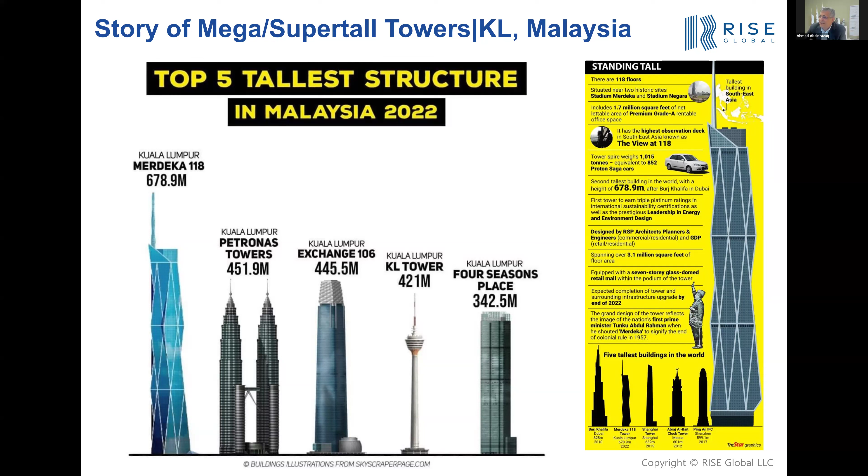During construction of this project, we introduced a very high strength concrete, and the QA/QC program done for this project was very unique. At that time, the concrete strength was about C80 concrete, and for almost 30 years nobody had used higher strength concrete until we came in and used C105, which I'll speak about for different reasons.

Now, the developer is PNB, National Investment Corporation, which is for Malaysians only. The employer is PNB Merdeka Venture, and we worked under Dato Tan Sri Abdul Azim, who was the CEO of the project from its inception to completion.

The contract administrator was Turner Construction, or Turner International Malaysia, where they did the contract administration mostly.

Some of the consultants include FKA, the international architects of the project, and RSP, who were the local architect of record and the executive architect.

For civil and structure, Lera out of the US did the schematic design and 50% DD, and Arup Malaysia, in collaboration with Arup International, were the structural and civil engineer of record. M&E, LEHR out of the US and KTA were the local consultants.

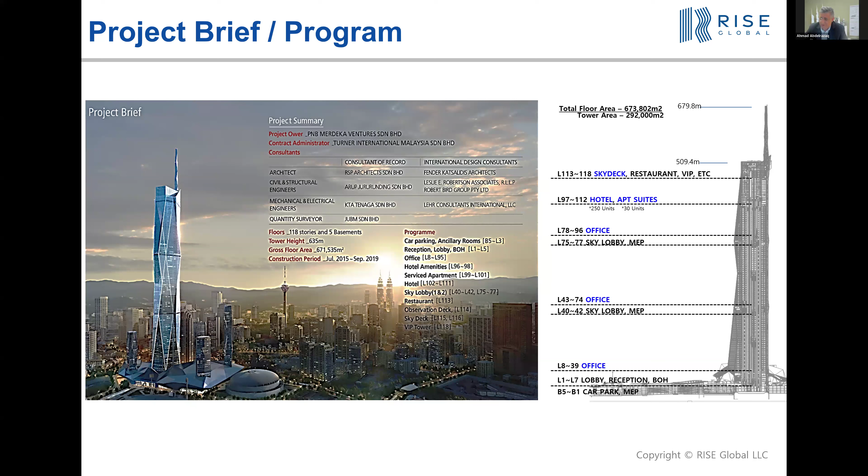The development of Merdeka 118 is a new project located in a very highly dense area near Chinatown. This area has big historic significance, but the traffic was also awful getting in and out of the area.

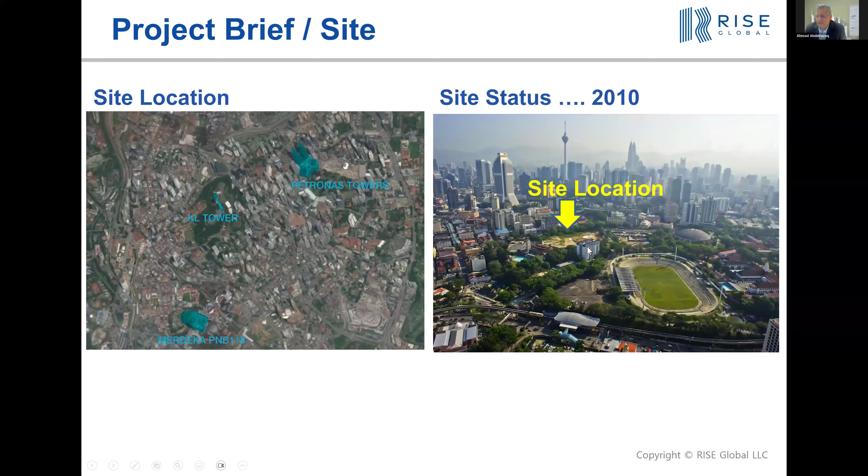The total site area was huge, with many activities going on with the infrastructure. The site was very big to be accommodated, so the client took it on itself as a national company to enhance the infrastructure.

They did analysis for the entire site in terms of traffic, and decided to add metro stations and a lot of roadways to improve overall circulation, making the site accessible to the LRT and monorail. They improved the whole traffic system over the entire site, so a very large number of people get into the site using mass transportation. A lot of traffic analysis was done by the client to improve the access problem and make the whole thing work.

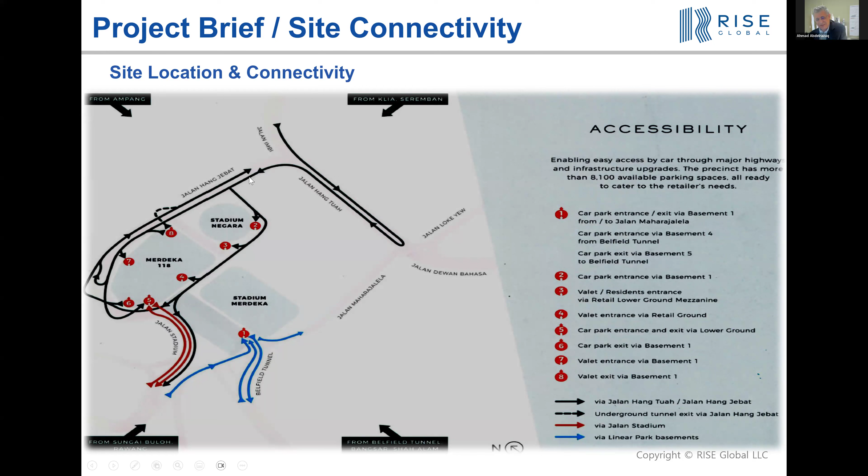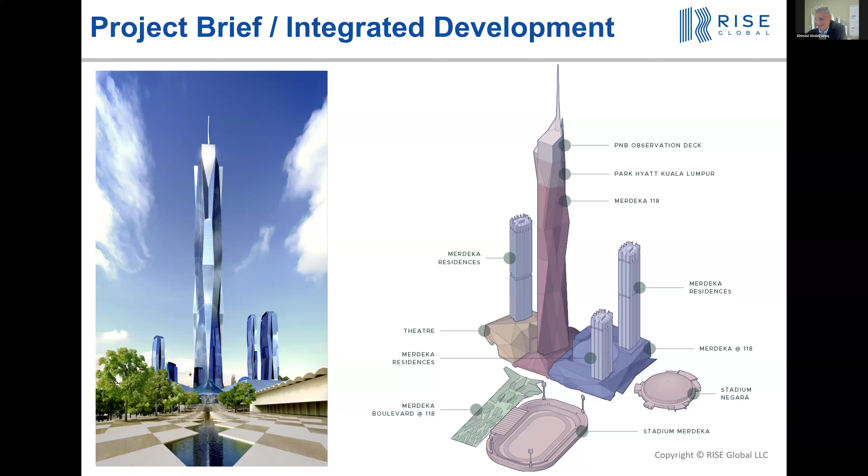Near the site they were building a train station. So imagine deep basements, a train station, Negara Stadium, Merdeka Stadium - all on shallow foundation, and we had to weave through all of this with a 5-story basement. Managing the vertical and lateral movement of the site was extremely important because we didn't want to affect the foundation, since any kind of settlement would have been detrimental to these buildings on shallow foundation.

The architectural design concept of the tower is very much influenced by the traditional Malaysian songket pattern, signifying diamond shapes, expressed on the outside of the facade. The spire's symbolic image resembles the silhouette of Prime Minister Tunku Abdul Rahman when he declared Malaysia's independence at the Merdeka site nearby - one of the significant things included in the design.

As Samsung's scope of work, essentially we built the site over this entire area, which goes around the Merdeka Stadium where independence took place, sitting on shallow foundation, and Negara, also on shallow foundation. We have a train station running across, and also a stadium nearby, all sitting on shallow foundation. The total site area was 76,000 square meters.

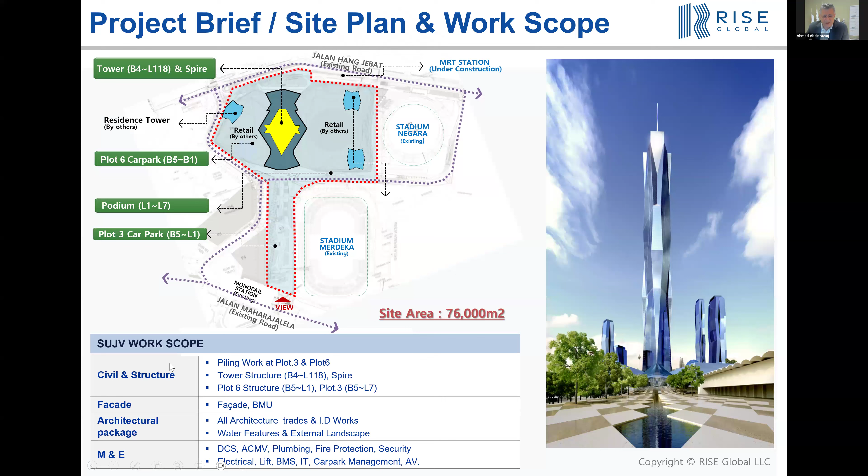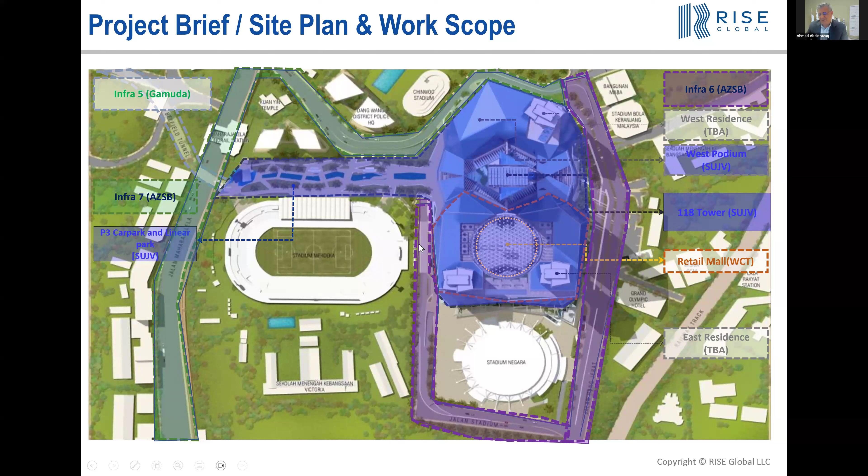Our scope of work was civil, facade, architecture, and MEP. The blue area was under our scope, but all the infrastructure going around it was under different contractors, so interaction and interface with all the other contractors was extremely important - we were in the middle of it. To complicate things even more, the client gave the retail to another contractor, so we were in the middle of all of this, presenting a huge challenge from a logistics and coordination standpoint.

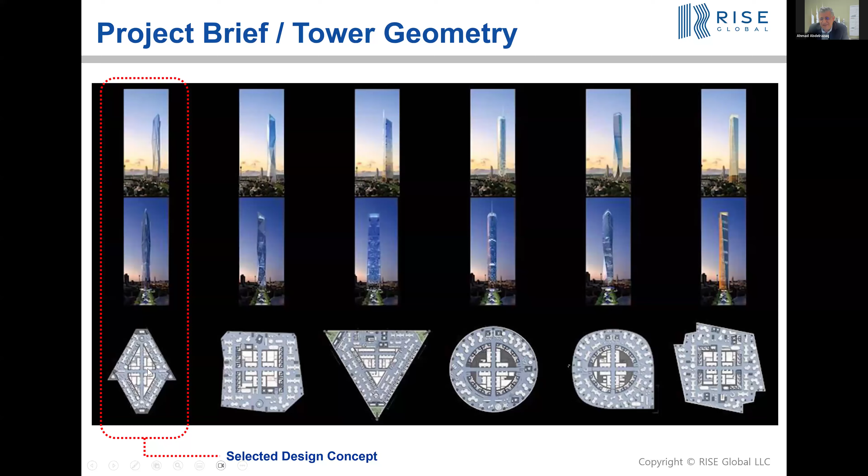Where did the design come from? It wasn't a design competition - the client selected FKA as the architect, and they proposed several schemes. The client selected the diamond shape scheme, which from a structural standpoint is not that easy - it's not the most efficient one for either wind or structural arrangement.

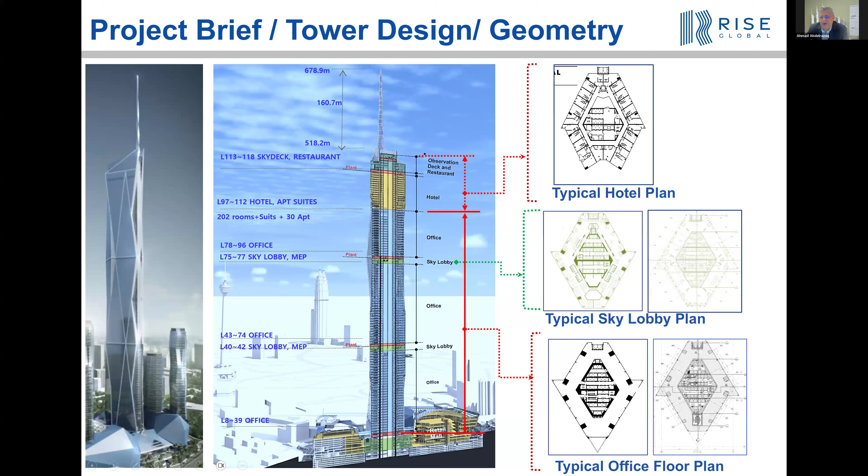This is what a typical office floor looks like. We have a central core, a mega column on the outside, structural steel framing inside, and a small steel column that transfers. These are at the edges of the building, coming in and out. This is a typical sky lobby, and a typical hotel floor from an architectural standpoint. The total spire height is about 161 meters.

One of the challenging aspects of this project is the wind engineering. When you look at this project, you'd think there's a lot of variation in the shape as you go up the height, giving the impression that wind is not that critical. But Malaysia has very benign wind - it's near the equator, and they don't have much seismic activity either.

However, if you look at the basic wind speed for Shanghai, Seoul, Busan, or Guangzhou, which are very high wind areas, for a building of similar height compared to Merdeka, the basic wind speed in Malaysia is 35.

Because of the shape of the building, there was a lot of crosswind response, in which the bending moment was so high—bigger than any of the other buildings—because of the dynamic response, which presented a big challenge.

The other challenge in this building is the neutral axis. Most of the material in the core, in the weak axis, is essentially very much concentrated here, and there is very little to maximize the moment of inertia of the building.

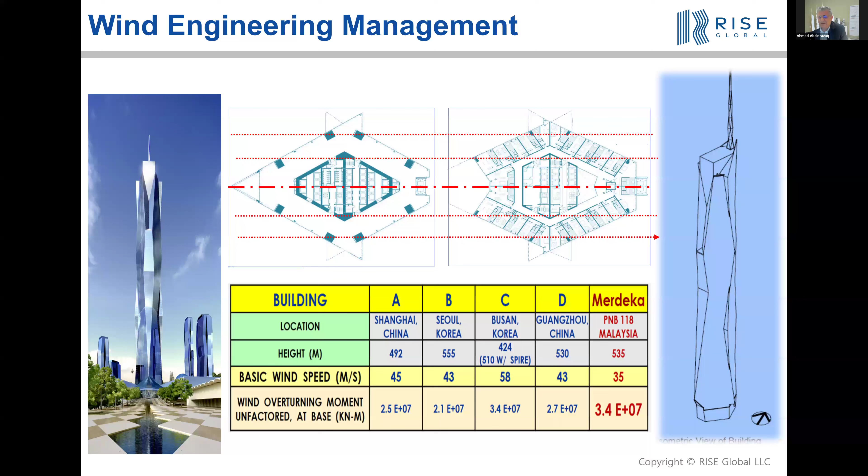And by doing that, we took out about 14,000 tons of rebar on this building.

In terms of wind engineering, the shape of the building is not ideal—it's like an airfoil. The Strouhal number for this is roughly about 0.6, and sometimes even higher. However, if you look at a square building, it's 0.12 or so, which means we had a lot of dynamic excitation on this building.

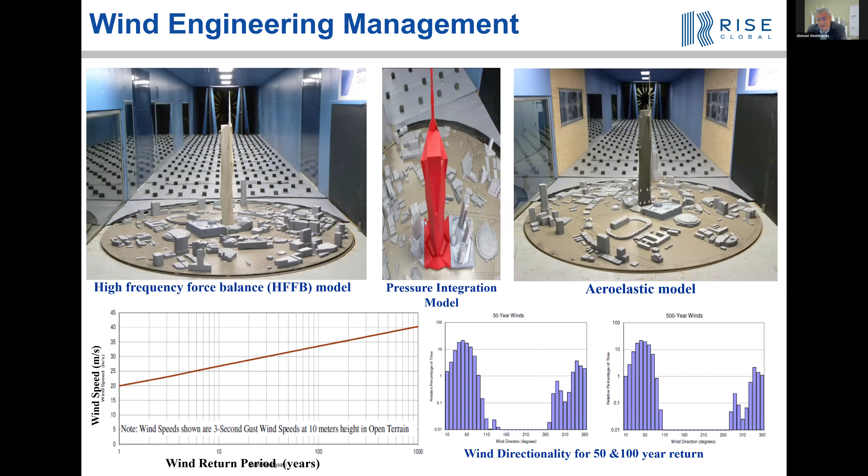We did a lot of wind tunnel testing, including high frequency force balance, pressure integration and aeroelastic testing. I won't spend much time on this because we had to redo some of it during the redesign of the building, but fortunately we didn't change the properties much. We also did cladding and pedestrian wind studies.

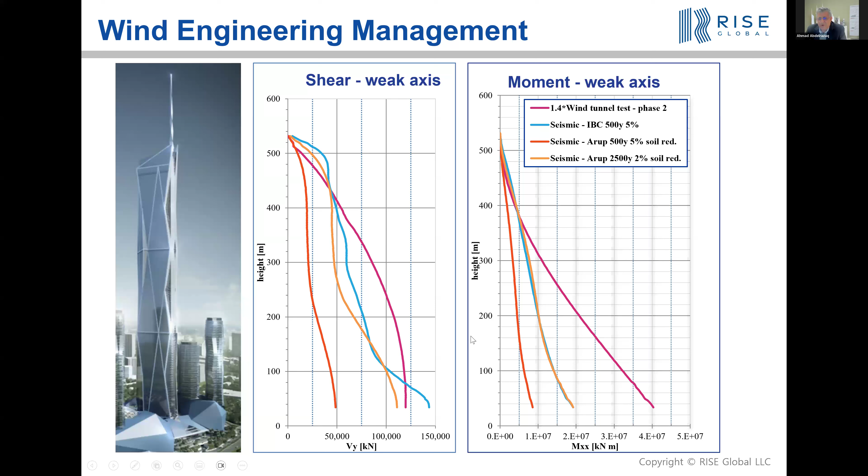What you see here is a comparison—as I mentioned, Malaysia is a low seismic region, however it's very close to Indonesia, which has very big earthquakes. It's an active area. We looked at long-range and short-range earthquakes in the region with site-specific analysis. Essentially, seismic really didn't control most of the design—the building was controlled mostly by wind, for both overall drift and behavior.

In terms of building acceleration, this is an office and a hotel, so we are within the acceptable range, and we didn't need any damper on the building.

Essentially, in the original design, when we redesigned the building, the client requested that we deliver a building with equal properties to the original design. So when you develop an alternative design, how do you match that? We did not change the structural system per se, the arrangement, but we were able to manage it, as we'll see later.

Some of the challenges of this project: the building is founded on 138 bored piles, varying from 2 to 2.5 meters in diameter. There are 8 mega columns, and they are pretty big—as I mentioned, 4.2 by 3.6 meters.

And the hammerhead—this area on top of the core where they concentrated most of the concrete in order to maximize the moment of inertia—is 7.4 by 4.35 meters. Initially they had a lot of rebar in them for additional stiffness. We were able to take out up to about 4%. It was a nightmare to do the rebar with this kind of arrangement.

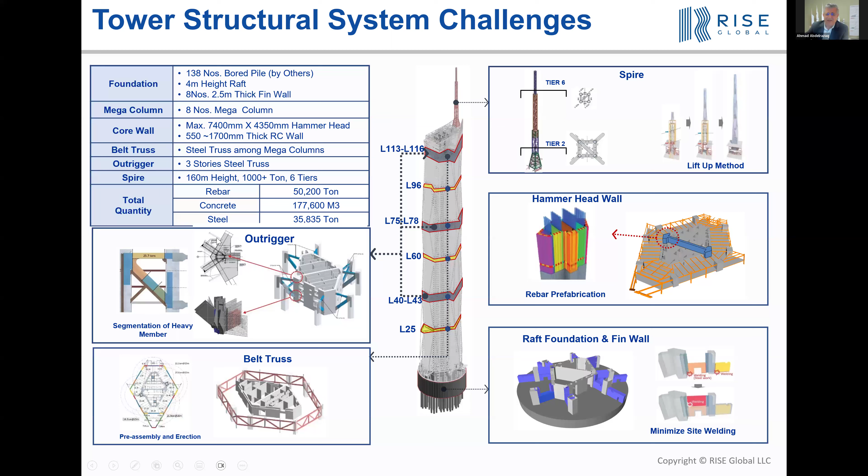The building is essentially linked together with outrigger trusses to the mega columns at 3 levels along the height. The spire lifting was very slender, and its constructability was very critical. We'll talk about those a little bit more.

This one demonstrates the lateral load resisting system of the spire of the building, which consists of the center core linked together with outriggers at 3 levels: 40 to 43, 75 to 78, and 113 to 116. This is because the building stiffness in the north-south direction is much stiffer than in the east-west direction.

Initially, we didn't really want the outrigger, but the client insisted to keep some of them. So we kept the lower one and the upper one only.

When you have a building like this, where it's a mix between concrete, composite column or concrete column, and then a structural steel element in between the transfer, the question is how do you manage the levelness of the floor and the construction sequence to make sure creep and shrinkage studies and column shortening are all taken care of.

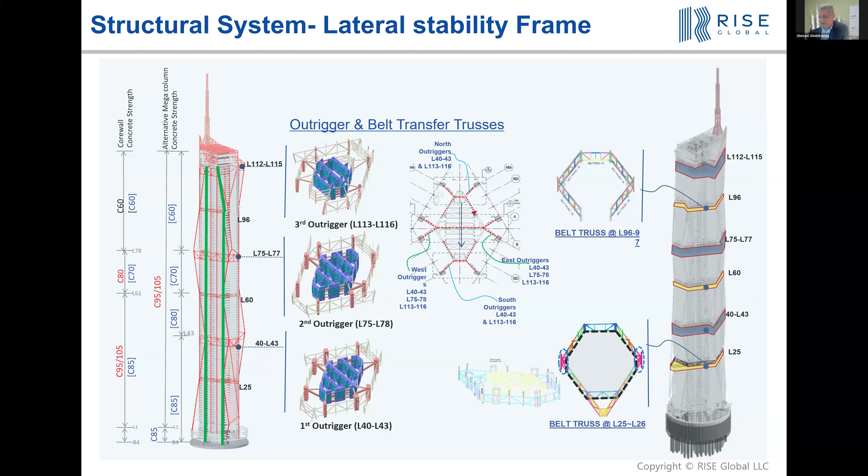The other challenge on this building is that the core at the upper building is asymmetric. So we have a very large lateral deformation due to the asymmetry of the building, and that's another challenge in terms of managing the verticality of the tower.

In summary, what we have is a concrete core using the ACS formwork system. We have mega columns here, which are mostly concrete, and then a structural steel column that spans about every 17 floors, which gets transferred to transfer trusses or belt trusses connecting to the mega column.

As I mentioned earlier, this kind of arrangement means the floor framing system is mostly composite steel structure. The differential shortening between the core, the mega column, and the structural steel elements was a very big challenge, so we had to do a very detailed construction sequence analysis and compensation program to achieve a leveled floor.

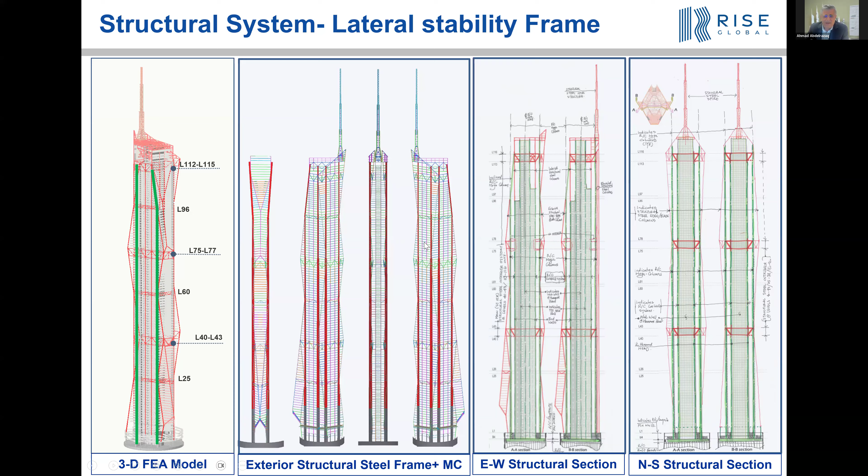These are just a summary of the lateral systems. The first one is the exterior frame, as you can see from the outside, and the east-west section of the core, and then the north-south section showing the center core and the outriggers at some of these locations. This is just an overall summary of the lateral system.

This is what the exterior envelope looked like for different sections. As you can see, it varies all over the place, but at least the columns were continuous, and only the structural steel elements shown in red vary.

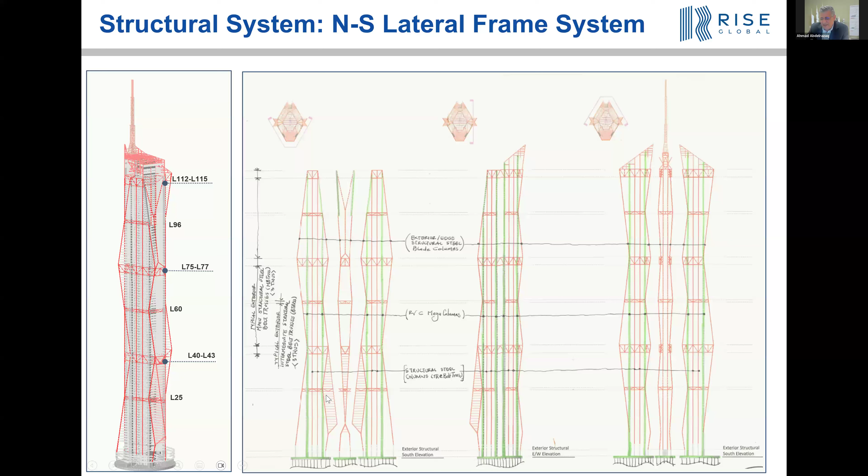And then we have a very big atrium from level 8 all the way to level 43. It doesn't really have any function - it's just an atrium where the observation elevator goes through.

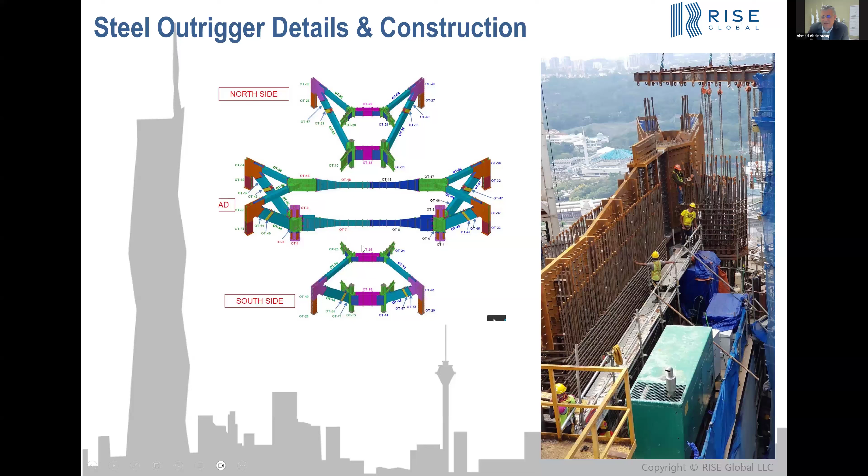The other challenging aspect of this project is related to the hammerhead. As I mentioned, we have the outrigger detail, so we were able to develop a detail made of structural steel elements to simplify the construction. We converted everything from structural steel members to more steel elements to take the tension and compression forces. This is just a picture of what the outrigger looked like.

This is a person here, what you see here for scale. So I developed an alternative design for the outrigger made out of steel plate. Initially, it was going to be casting, but you couldn't really do casting for this kind of size, and we couldn't find anybody who can guarantee the casting.

So we looked everywhere, including Spain and Europe, and China, but we weren't able to find somebody who's able to do the casting. So we did it with built-up structural steel elements instead.

So I developed an alternative design in which we were able to create a pre-assembly for all the mega columns, including two small structural steel erection columns. We created a template in which we installed all the rebars with couplers, perfectly pre-matched. Then we were able to erect a pre-assembled mega column, including steel, rebar, angles, embeds, and connections to the steel, making it part of the structural steel construction, which made life much easier for the labor.

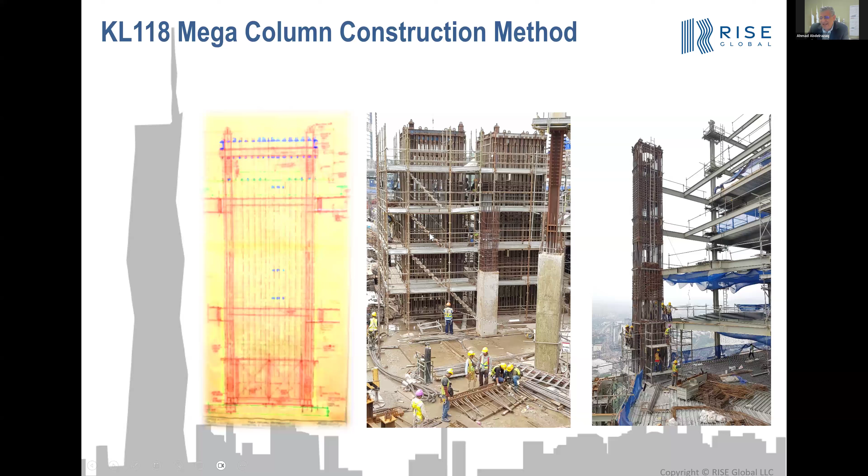We also increased productivity significantly because all the pre-assembly was done on the ground and lifted up into position, so we didn't need a lot of labor. Productivity went up from 250 kilograms per man day to about 2,500 kilograms per man day. This is just showing some of the member sizes, which I won't go into detail on, but the picture here shows how it works.

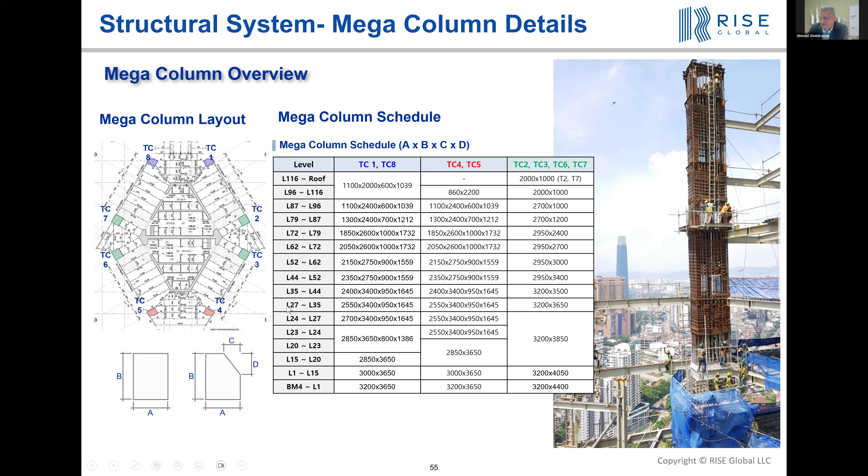One of the challenging aspects of this project is the mega column, the hammerhead. As you can see, it's a 7.4 meter by 4.3 meter solid concrete element in order to give us the moment of inertia. Initially it had about 4% rebar. We were able to reduce it by using high performance concrete up to about 105 MPa with high modulus to about 1%. That made life a little bit easier.

But the other challenge, because of the size, as you can see, it's a very long element in both directions, so we need intermediate rebar in order to hold the rebar and keep it from sagging.

In addition, we developed an alternative solution where we were able to use a Baugrid system in which we could organize this in a much better arrangement. Instead of having a central core, we were able to divide it into 2. We did a very detailed Abaqus analysis to show the performance of the two. The confinement has to be considered, the core is much bigger than the concrete that we have to confine. With this kind of arrangement, we divided it into 2 smaller cells.

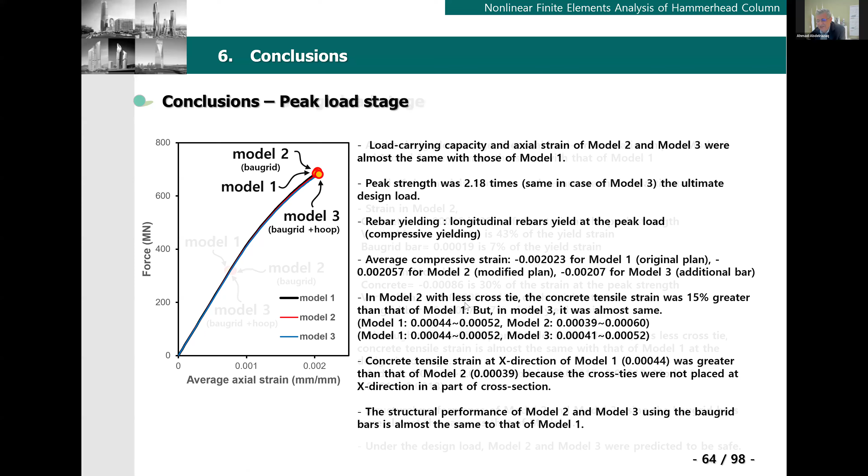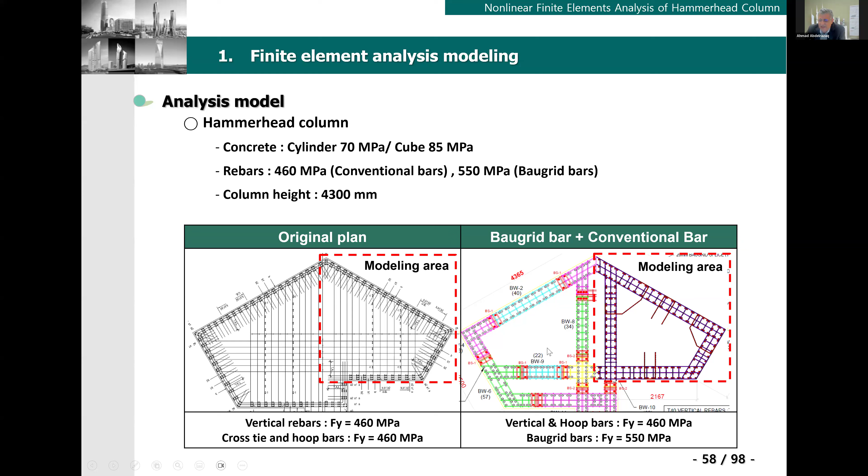I think in the future this is something that the code doesn't address, and it's important when you have these massive elements, from a stability standpoint, you can have a really nice ring, very tight together, very nicely. Sometimes it's something we can look at in the future, how we can improve the detailing of such massive elements.

Now, in terms of the concrete planning work, initially we started with C85 concrete, C70 and C60, but in order to take 14,000 tons of rebar, we used C95 with high modulus. When we did this, the client wanted to guarantee we have all the aggregate, so we went to a quarry in Johor and pretty much bought all the aggregate at once, guaranteeing the client there would not be a shortage.

At the same time, because this is the first time C105 is used, and we use C95, we did a lot of study correlating concrete strength cylinder versus cube. We decided to convince the client to just do a cylinder test at the end of the day. We did a huge amount of work correlating the two together, and using cylinder was definitely a much better test than using a cube for this kind of testing.

So we did a lot of work on this for the planning: trial mixes, mechanical properties, durability tests, creep and shrinkage tests, pump simulation tests, heat of hydration tests, because this is in a very hot climate and at the same time we have massive elements, including the raft, the hammerhead, and the mega column. So procuring these elements became extremely important.

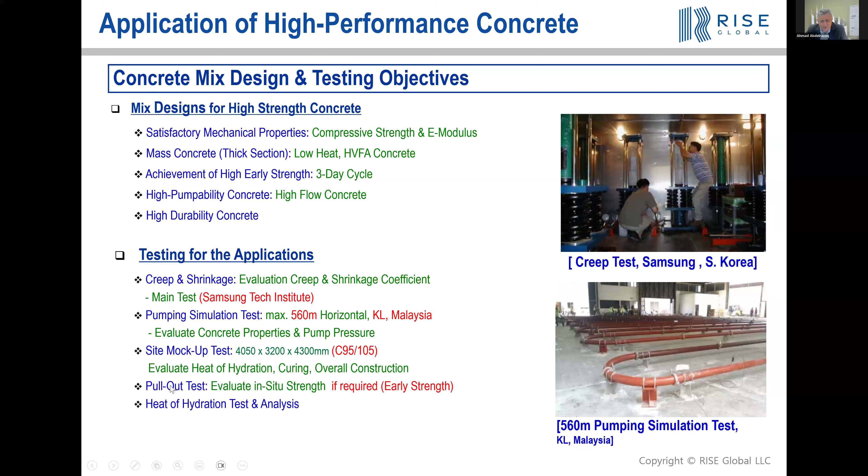But we did a lot of work with Lafarge and our concrete team, and myself, to develop a mix design that is very sustainable, high flow, and also low heat of hydration, where the temperature didn't exceed around 70-75 degrees maximum. It was a triple blended cement where we have OPC less than 50%, which I'll talk about a little bit more. So we also did heat of hydration analysis for the raft.

Because we had a dedicated batch plant on site for high performance concrete, very close to the site, we were able to use icing and shaved ice, along with a lot of QA/QC programs to keep the temperature of all ingredients and additives under controlled temperature. Everything was sprinkled, cured, and protected from sun to keep the temperature down. We achieved mixing temperature of about 25 degrees. For mass concrete we targeted 28, but achieved less than that due to proximity of the plant to the site, and we managed the temperature of the raft and mega column within 70 degrees centigrade.

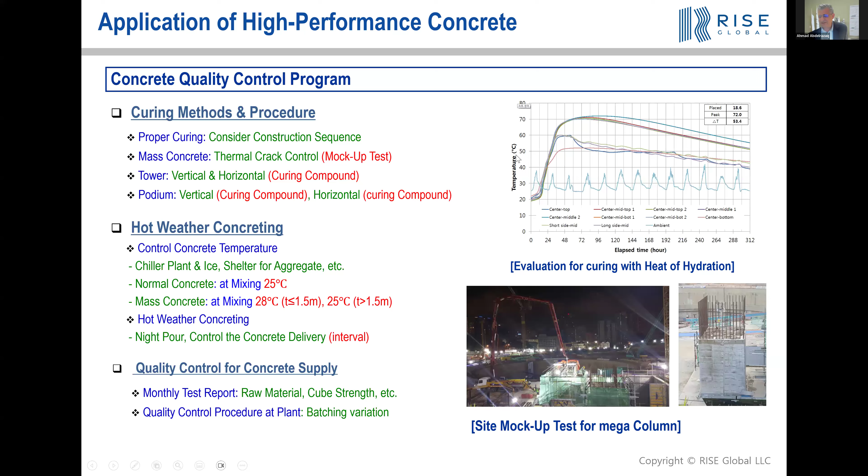These are the concrete mix designs. We have the same mix design, with the main difference for low level being that we used 145, 550 binder, almost GGBS 45%, silica fume 10%, so roughly 55%, with the rest OPC. For the CM, it's the same, but we mostly changed the aggregate size, keeping all aggregate size to about 14 millimeters. We didn't change that a lot.

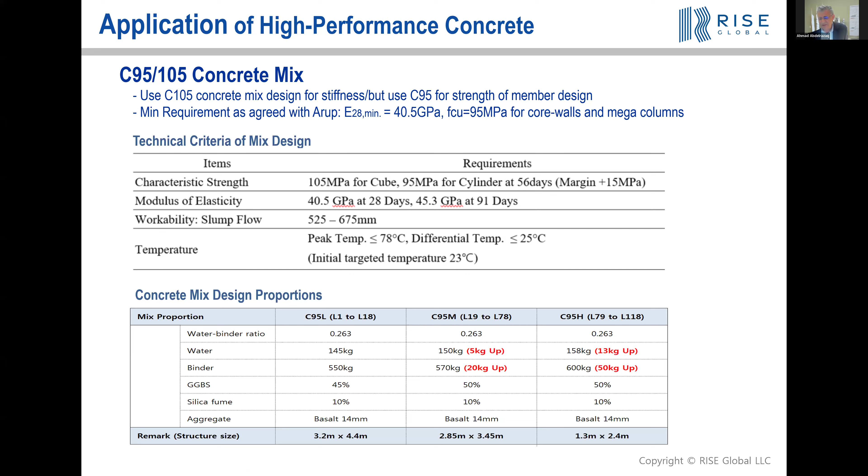We kept the temperature differential within 25 degrees. We didn't have any cracking on the concrete column or the mega column. We cured it properly, and this shows the concrete strength.

So the strength was not the issue, we were looking for stiffness. We agreed with the client that we would achieve 95 MPa cylinder strength, but actually what we were getting at 90 days was about 110. So we had about 15 MPa more strength than needed as target, so the client could feel more comfortable.

For the modulus of elasticity, what we initially targeted was about 40. We told them that with 91 days we would achieve up to about 45. But in reality, at 91 days and above, we were able to achieve up to about 50 gigapascal of modulus of elasticity, and that helped the project enormously in terms of behavior.

This is a large-scale mock-up test that we did for the heat of hydration, which I showed earlier.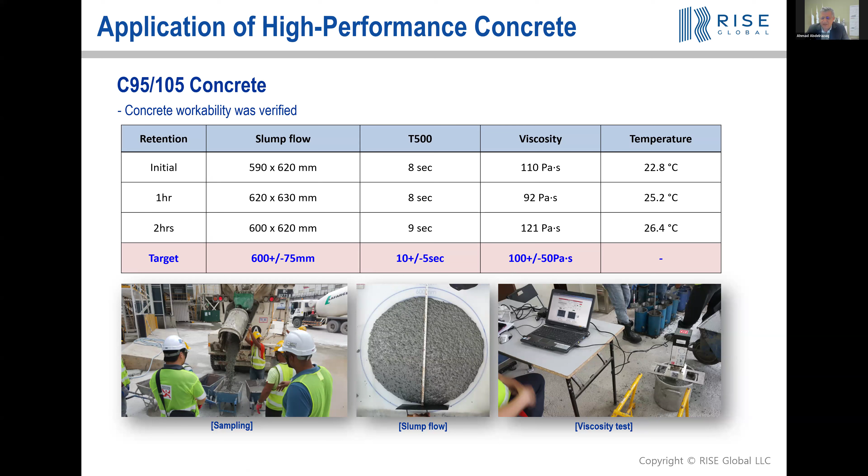This is also in terms of workability. We had the slump flow targeted at 600 millimeters, and we needed to make sure the viscosity and the rheology of the concrete were important. We did a lot of work, as I mentioned, between ourselves and the Lafarge team to make sure we achieved a very nice system without any segregation or bleeding at all.

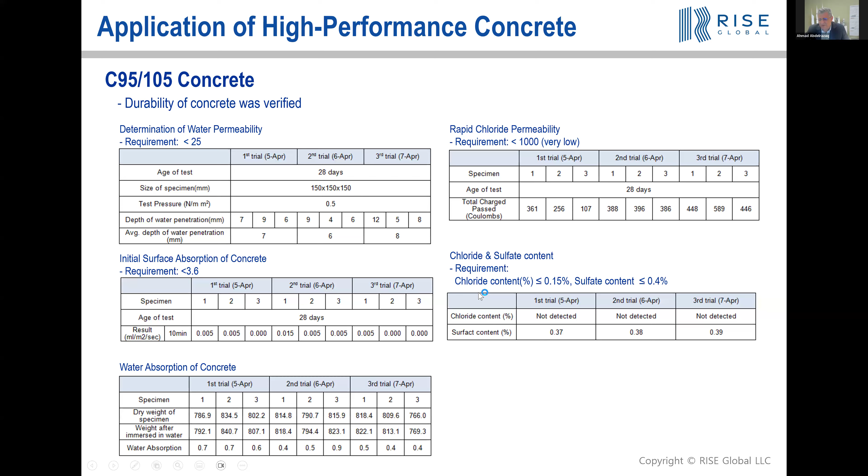We also did durability tests: water permeability, initial surface absorption, water absorption, chloride permeability, and sulfate content. We did all of that, and it's all well below the requirement.

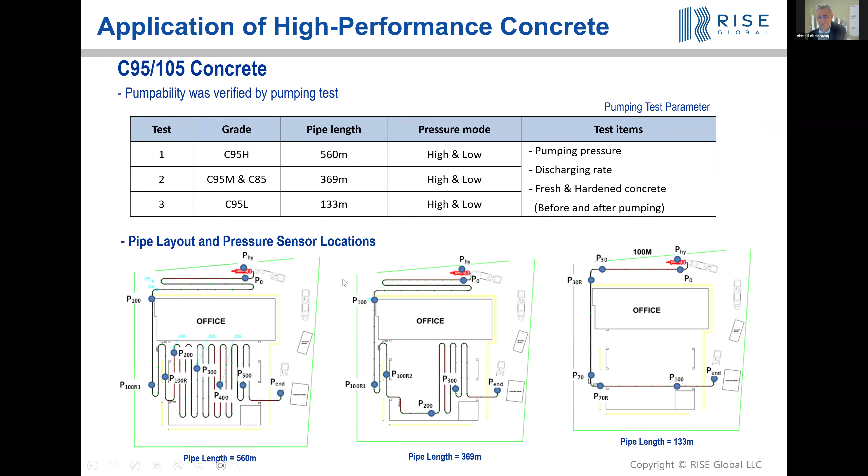This is the pumping test we did for all the different mixes that we have: 133 meter, 369, and 560, same kind of arrangement, using the deposit and then checking at the end with pressure sensors to look at the losses and how to apply it vertically. This is just a concrete setup we did at the site, very close to the project.

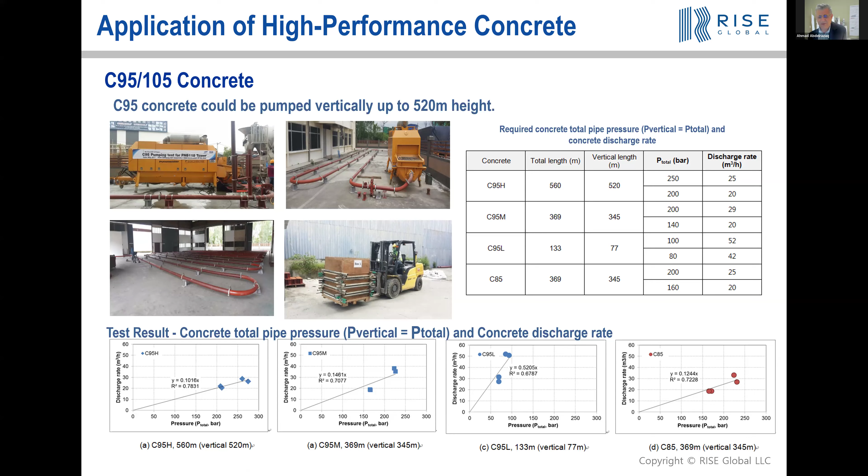For creep and shrinkage studies, we did all kinds of tests, sealed and unsealed, because the concrete stress on average is about 15%, since the members were controlled by stiffness, not necessarily strength. But we did the creep and shrinkage tests, especially creep at different stress levels: 15%, 25%, and some samples up to about 40%, just to make sure the behavior is okay.

Everything was under controlled temperature. No matter where I am, I can access the room, I can access the temperature inside the room, the humidity, the load cells, and the results of the strains for all the samples. So it was a pretty nice setup, a real-time measurement system that we had.

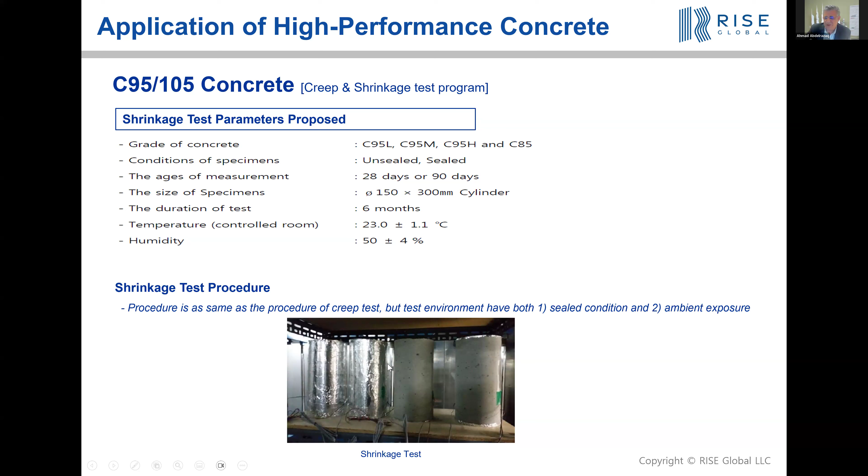This is something we did with sealed and unsealed samples, as I mentioned, in order to do column shortening analysis for the project to make sure that the planning is done right.

One of the things you will see here in terms of modulus of elasticity, we compared what we measured at 3 days, 5 days, 7 days, and so on. We actually have a laboratory at the site where we were able to measure the strength and modulus of elasticity on site, so we had a lot of flexibility to get a lot of data.

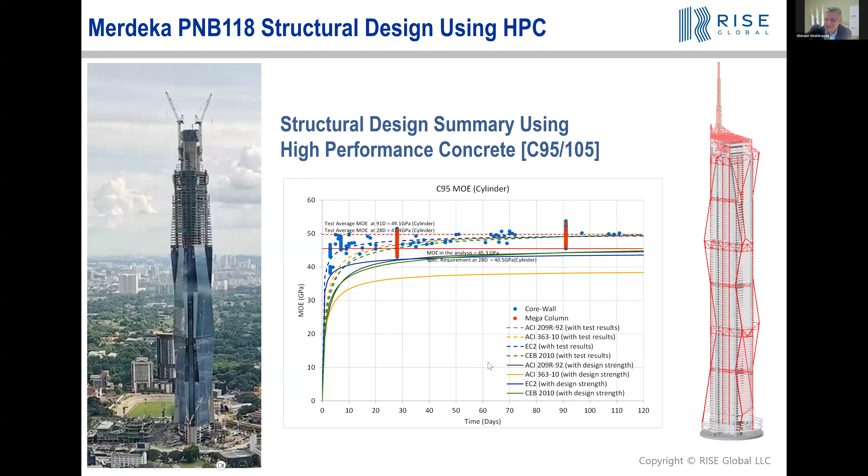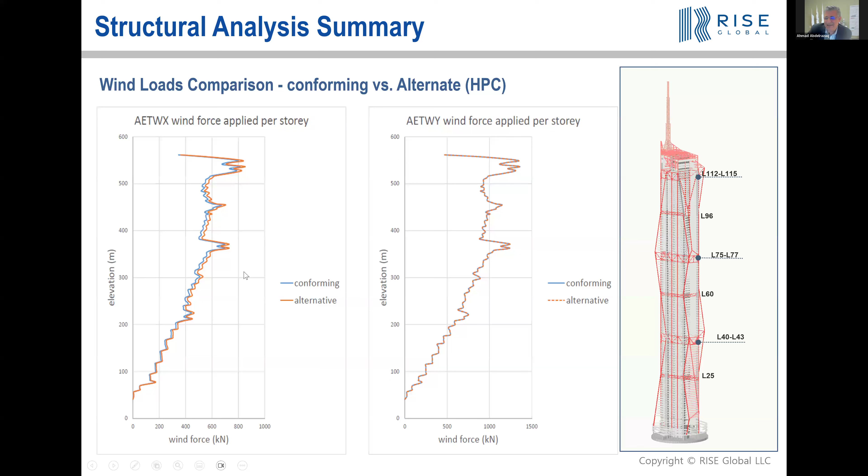We promised the client that we would deliver concrete with about 14,000 tons less rebar, 10,000 tons less steel, using C105 concrete with equal performance. As you can see, we pretty much matched the performance of the building using high performance concrete, for both the original design for wind and for lateral drift.

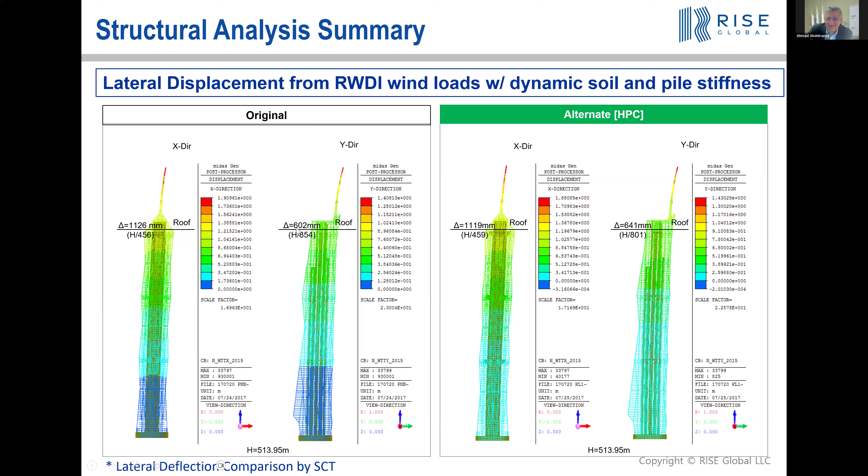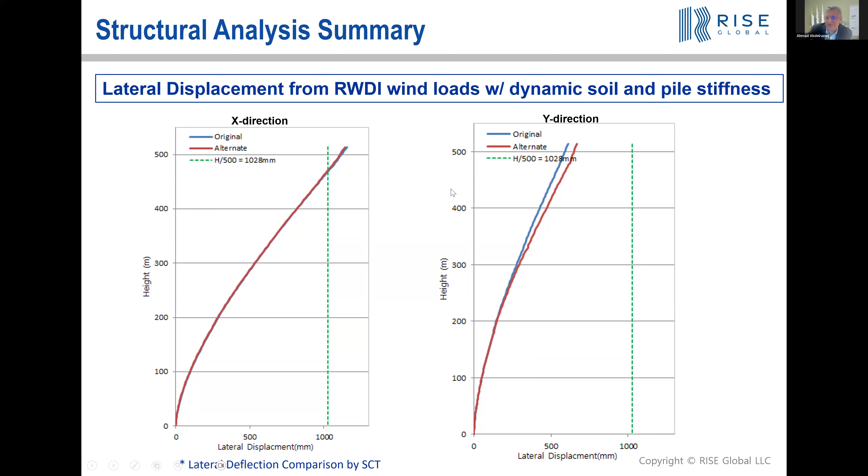As you can see, the original design had a displacement of 1.1 meter, and the alternative design also 1.1. In the y direction, we have 602. In the alternative design, we had better overall behavior. In terms of drift, we also fully matched the drift between the original design and the alternative design. Inner story drift was also the same. As you can see, we matched both.

But also, since we used high performance concrete, we were able to reduce the thickness of the wall by about 15%, which meant less load on the foundation. So we reduced the concrete by 15% in the core. We took out 14,000 tons of rebar and 10,000 tons of steel, and we were able to have equivalent performance of the building.

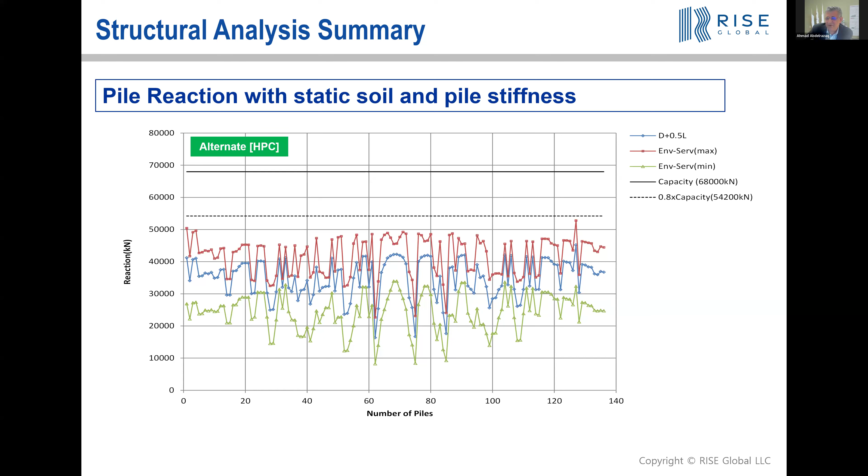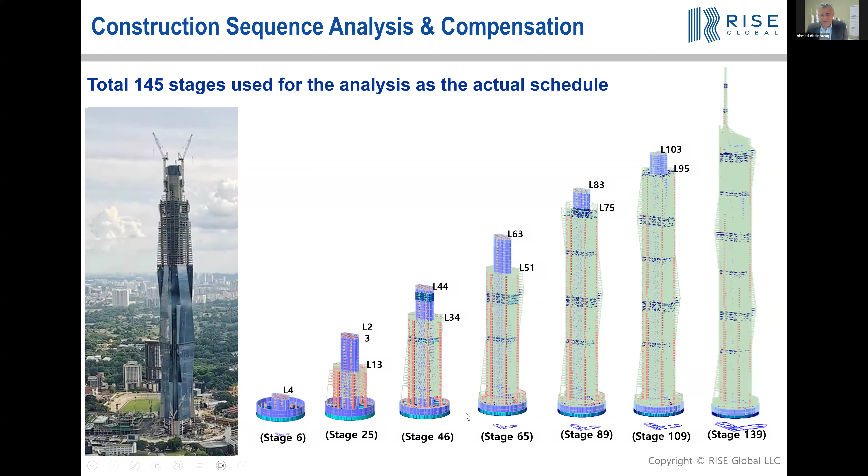The other thing we did is a construction sequence analysis of the project, for many reasons. One is that we now had all the concrete tests—the creep and shrinkage, the modulus, all that kind of stuff—so we included that in the model.

Essentially, we ran the analysis using Eurocode, as I mentioned before, as a base for creep and shrinkage studies. We have the ultimate creep and shrinkage coefficients that we used in the analysis.

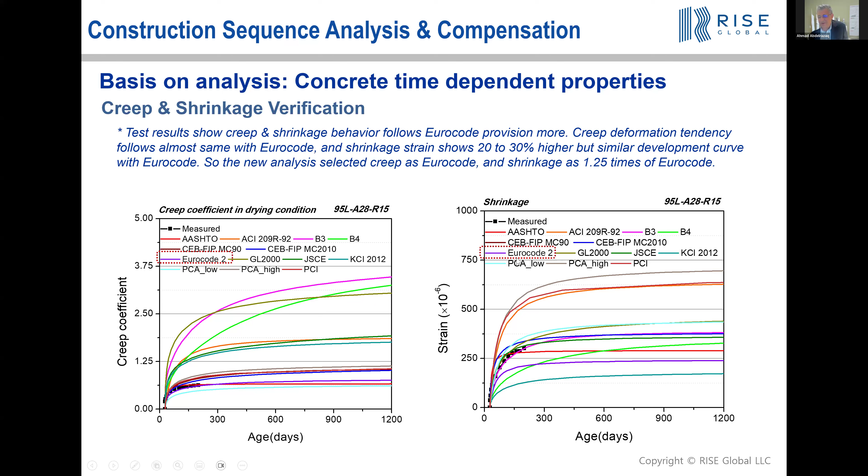One of the things that really interested me was to correlate and find out which model code is the best to use. As you can see, when you look at the creep coefficient in drying condition and also the shrinkage, the codes are all over the place—from AASHTO to ACI to CEB to Eurocode to GL2000, PCA, PCI, and also the Korean and Japanese codes. As you can see here, the best fit, based on our tests, was Eurocode. So we used that as the basis for our creep and shrinkage studies.

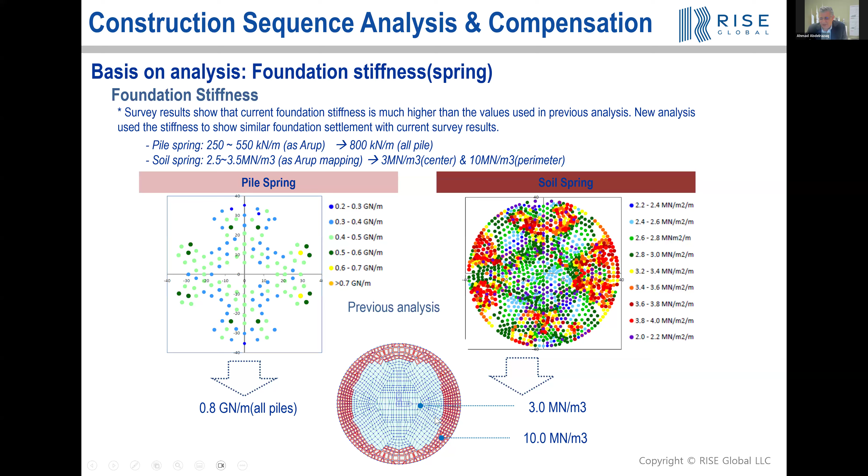The other thing is we installed a structural health monitoring program on the building, and we were able to measure the actual settlement of the building and correlate it, because settlement is very important for creep and shrinkage too. What we found is the foundation stiffness was much higher. So from the settlement analysis, we were able to adjust and correlate what we measured versus what we had, and we used that in the analysis of the project.

So what you will see here, at the end of the day, we got a much better building with less deflection, more than a 10% reduction in overall drift. The dynamic frequency of the building went from 11.8 to 10.9 because we had less mass and more or bigger stiffness than we even originally planned. Also, the torsion was much better than what we had originally.

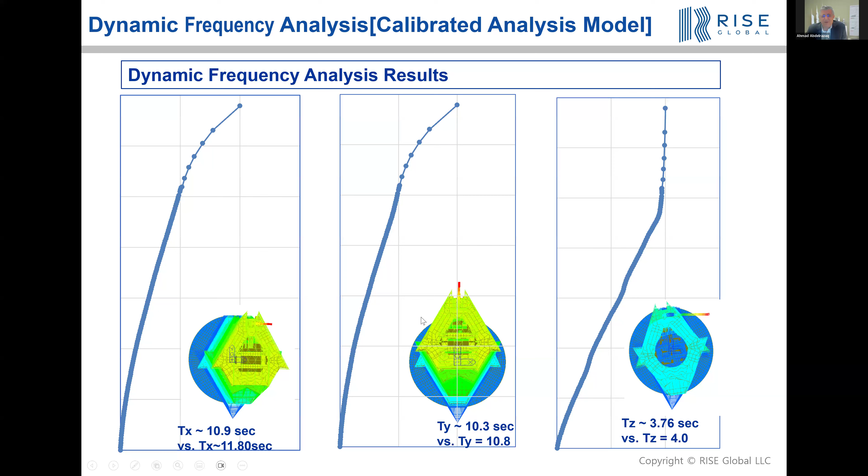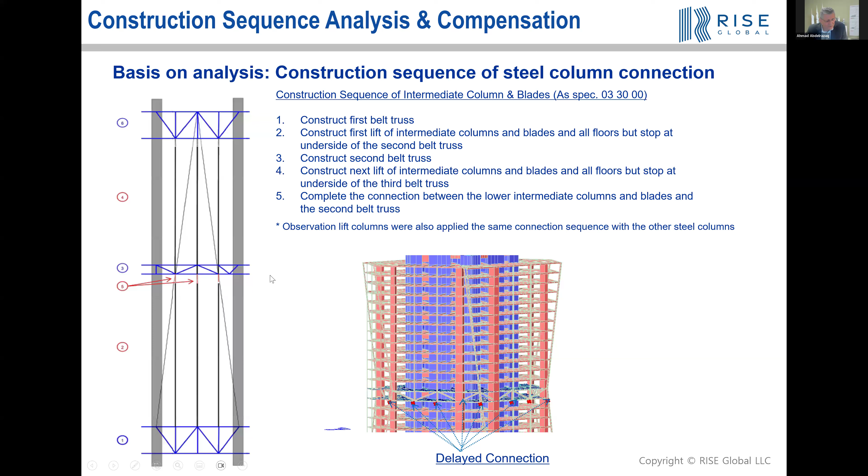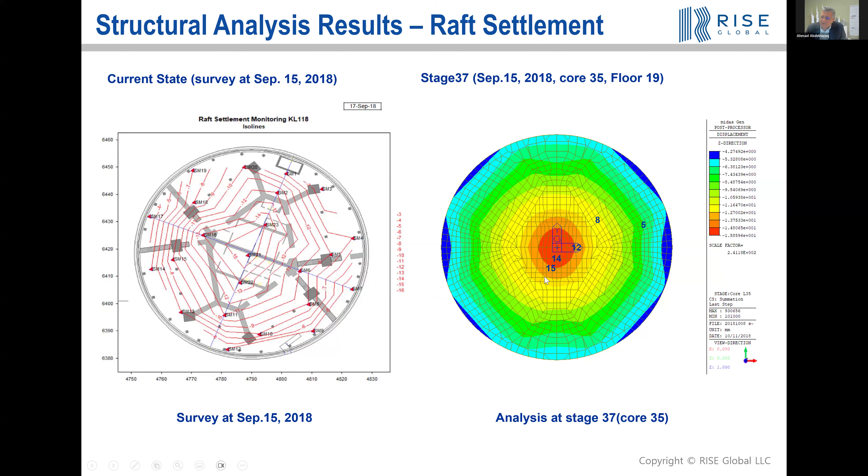What you see here, we correlated the settlement analysis for what we predicted versus what we measured in reality. We adjusted the spring stiffness to correlate those, and continued to use that approach. As you can see, with time we had a maximum of about 34, then a little bit more, 40 to 42 or so. At the end of the day, after November, when the building was completed, we predicted about 40 millimeters of settlement, and in reality we got about 44.

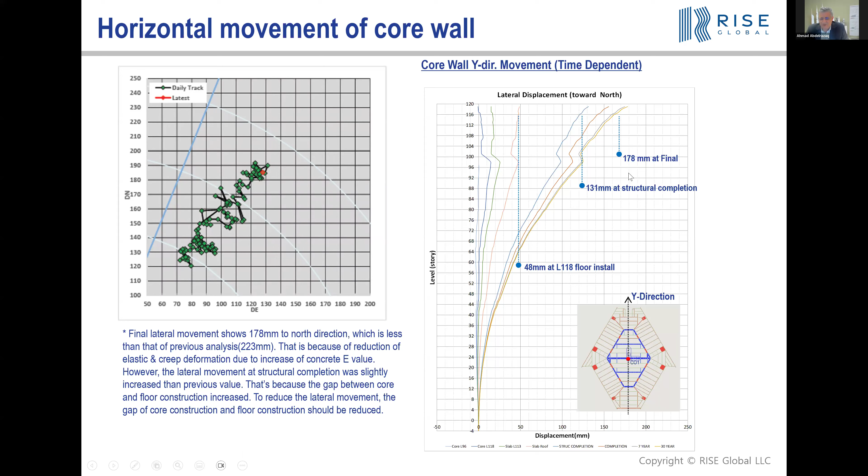We also correlated the lateral displacement of the building. We have a GPS system tracking the lateral movement of the building over time, which was critical for elevator commissioning and setting in the right direction. Initially we predicted about 223 millimeters of lateral displacement, but because of the extra stiffness, it was reduced to 180.

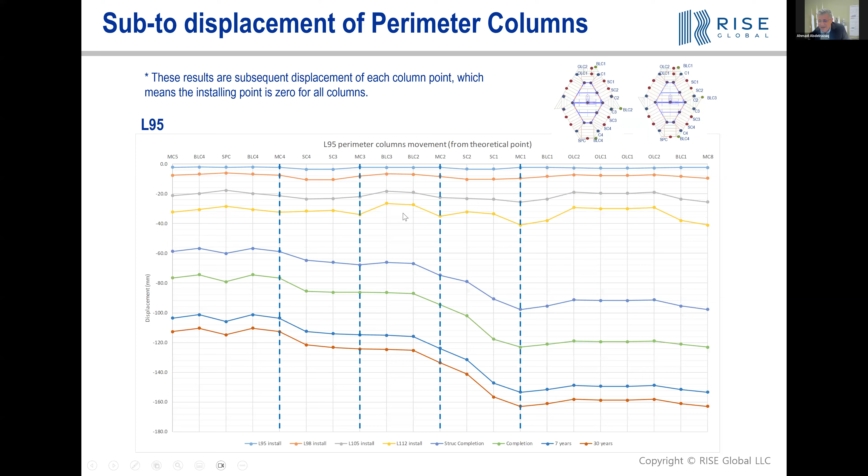We did a lot of studies in terms of creep and shrinkage, and also compensation, as I mentioned. We have mega columns which are concrete, and intermediate steel columns. The question is how do you keep the floor level? We spent a lot of time making sure the differential between the mega column and the steel column remained manageable, and developed a very detailed compensation program to deal with this issue.

We implemented it, and also had a very detailed structural health monitoring program. We added accelerometers at the base, at every mechanical level, at the top, and at the top of the spire. We also have dynamic strain gauges in some of the steel outriggers to measure effects due to gravity and wind, and tilt meters along the height of the building to measure lateral movement over time and make compensation as required.

We also have strain gauges in the columns to measure total strain, and survey methods to measure the building's actual displacement. We have GPS units, dynamic strain gauges, and a weather station at the top of the building during construction, which will remain as part of the permanent stage at the end.

I'll speak very briefly about the construction sequence. As I mentioned, we have a train station and stadium on a shallow foundation, and a very deep basement. The site was huge, so we were able to use semi top-down construction for the entire site, keeping the center area open, which allowed us to speed up construction.

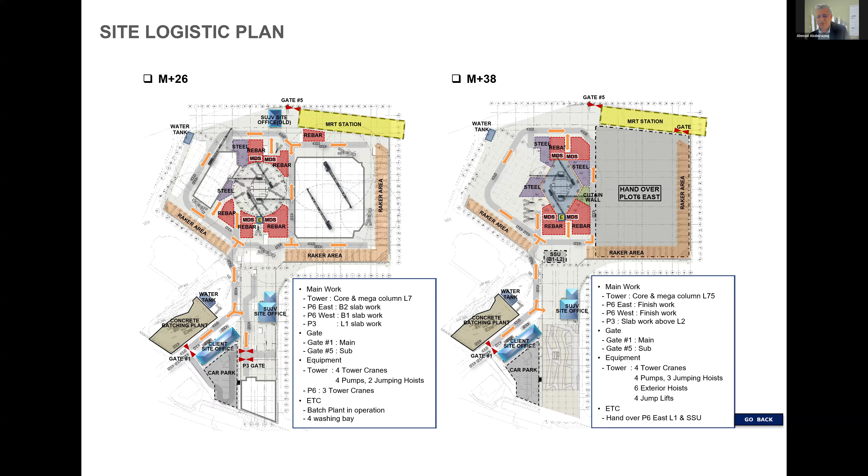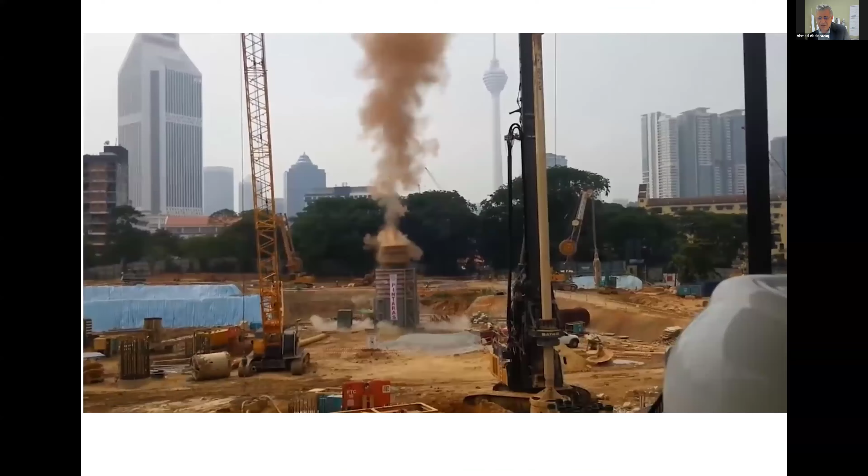Pile testing was done the traditional way. That was before our time, done by another contractor. This is what the site looked like when we started the project.

One of the challenges was casting the raft, because we had about 48 hours to cast 19,000 cubic meters of concrete, and had to deal with weather and rain while keeping the temperature down. So we added a temporary cover on top of the building spanning about 80 meters in diameter, using fabric and wire, supported by the crane structure and a cofferdam at the outside to stretch it, so it was fully protected during the whole construction process.

We had a very detailed quality control program. All the trucks that come here get tested, and we have pump stations all around, so no trucks come directly here.

If the temperature of the concrete was higher than agreed, we had methods to reduce the temperature by about 5 degrees at the center to manage the concrete mass, lowering the deposit temperature to about 20 degrees at the center, allowing us to manage the heat of hydration to a manageable level.

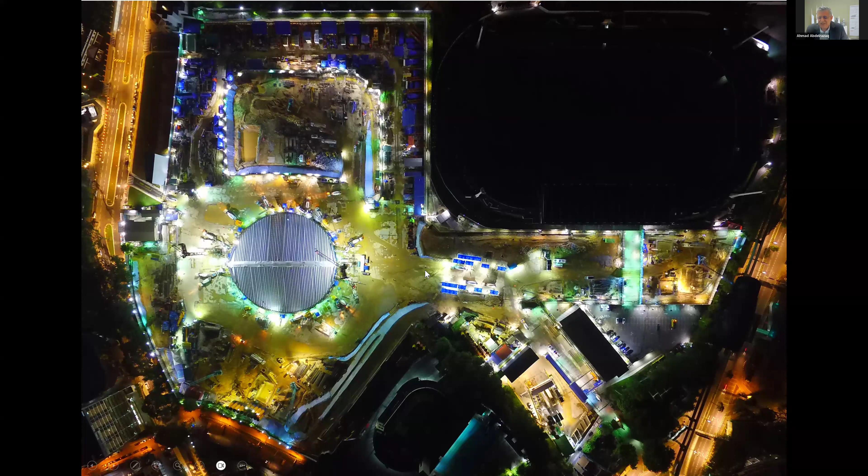There was a very strict quality control program. We have a nitrogen station here in case we need it, though we didn't need it much since we were able to control the temperature pretty nicely. This is the nitrogen station that we have.

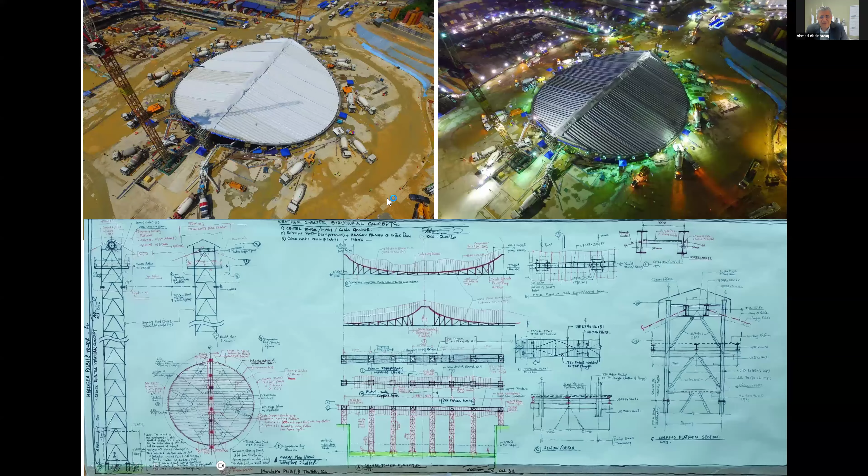This is the structural system of the roof, using 15 millimeter cable stretching from one side to another, giving us the flexibility to open and close it like a curtain when needed. This is what the site looked like during construction, all undercover.

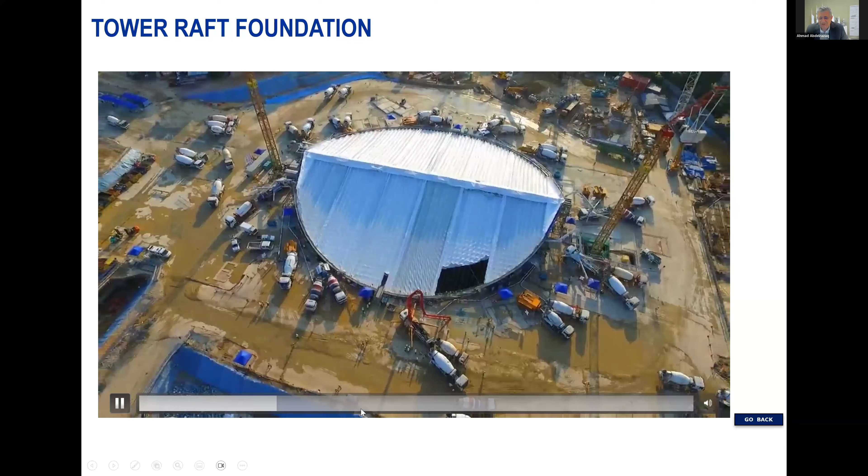I'll just skim through it very quickly because of time. We were working over the weekend for 48 plus hours to deliver this.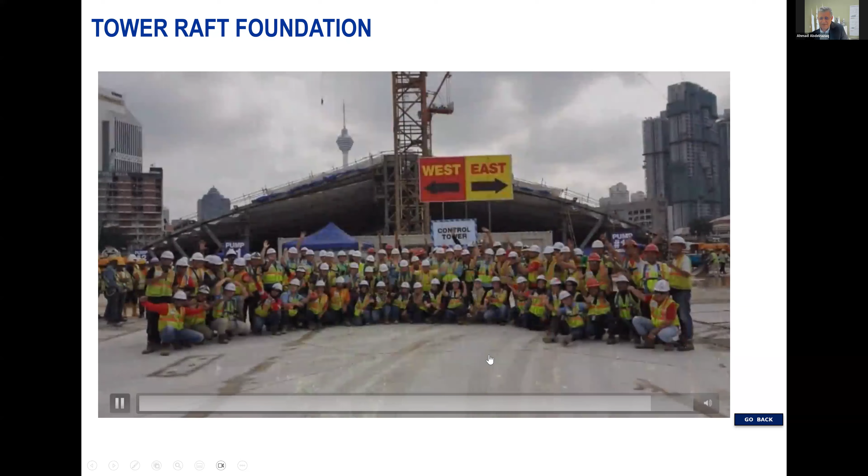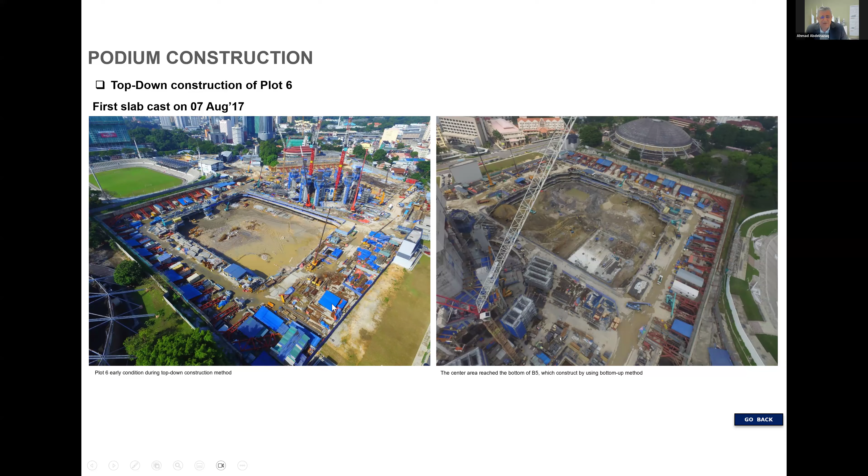So I'll skip over these, just the logistics and planning of the project. This shows the semi top-down construction. This is the tower, this is the east part, that's the west part of the project. We used an excavator for semi top-down construction, excavating from underneath while we're going down. So that is some of the images.

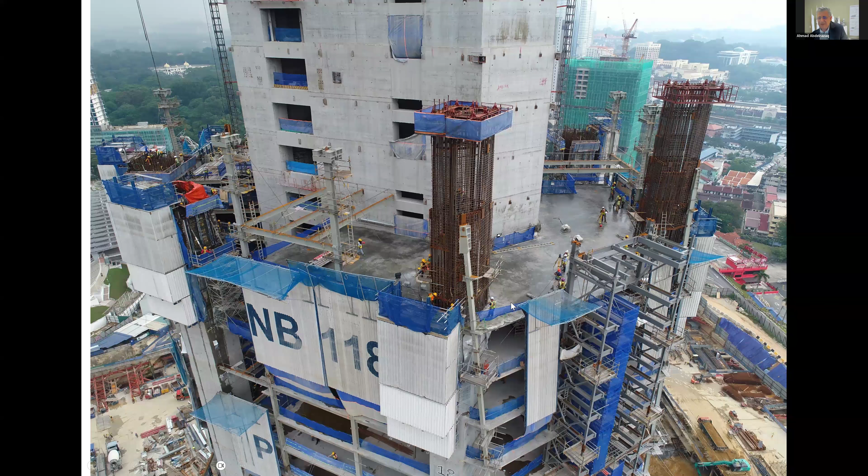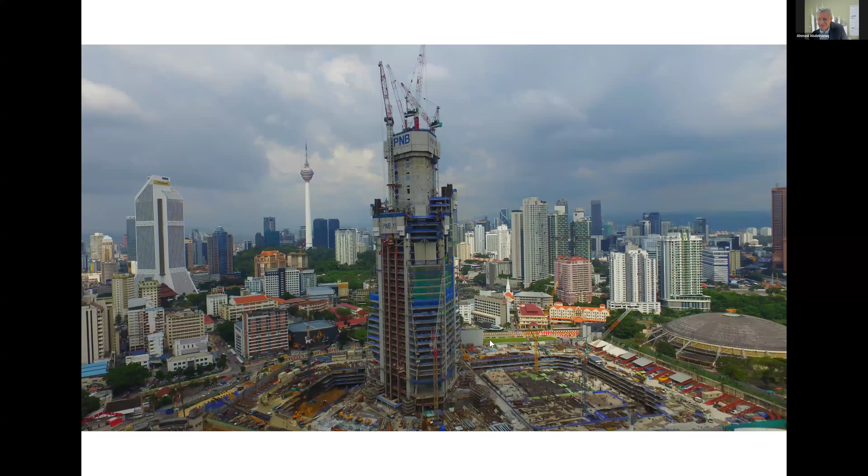Some of these pictures I used to take myself, very close proximity to the site. I used to go to Merdeka 118, and some of them were taken by drones. And this is the ACS formwork system.

It's a huge core, as you can see. All the equipment, the concrete placing booms, and also the cranes.

And this demonstrates the mega column construction and other structural steel construction. As you can see, we installed pre-assembled, prefabricated mega columns that have the rebar, the ties, the connectivity, everything, so it minimizes the amount of work that needs to be done around these elements.

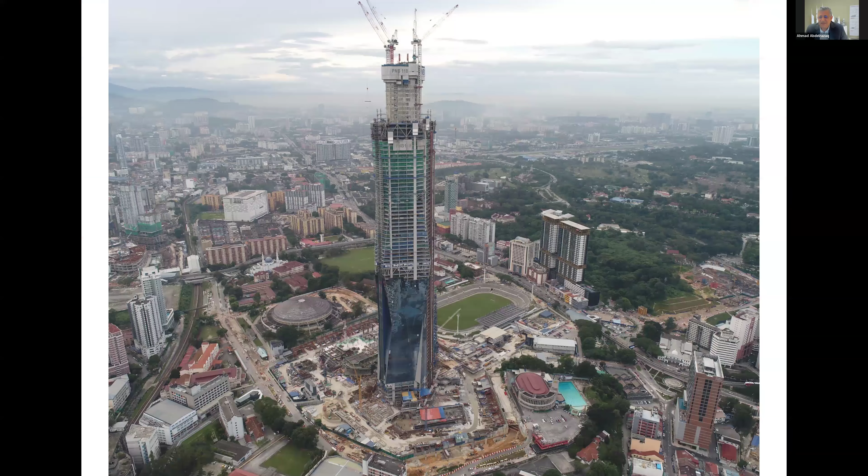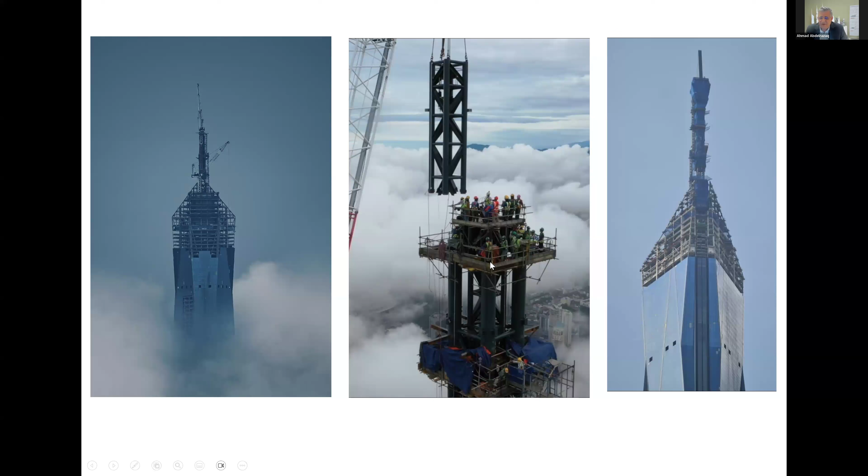And this is the cladding, finishing of the spire. These are the pre-lifting images of the spire, which is a very, very thin spire, not easy.

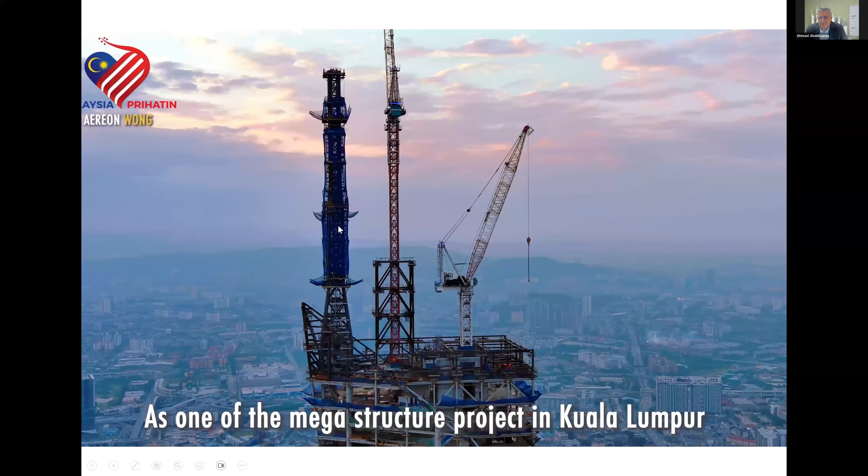But one of the things we did here, I proposed adding bracing, additional bracing for the crane, so we didn't have to lift a lot of pieces, and it made things much easier for lifting.

This one demonstrates the spire lifting. Pre-assembled, lifted from the top platform, and then as we go up, we installed the facade, and then did some of the lifting of the spire from within, up the center.

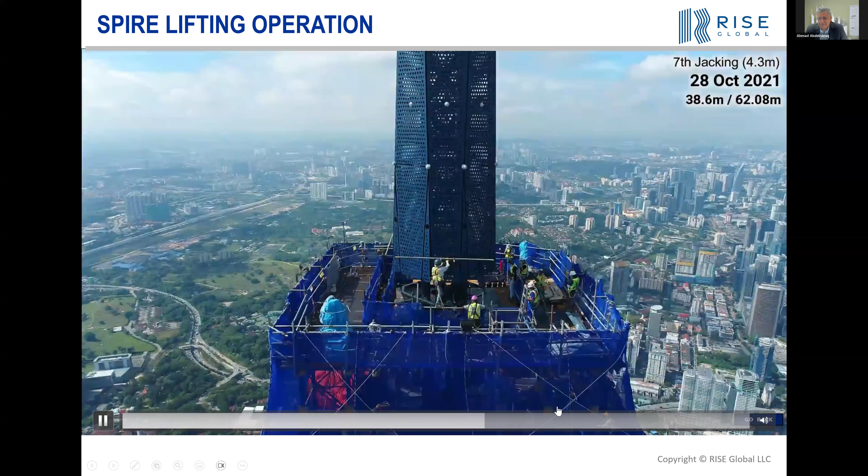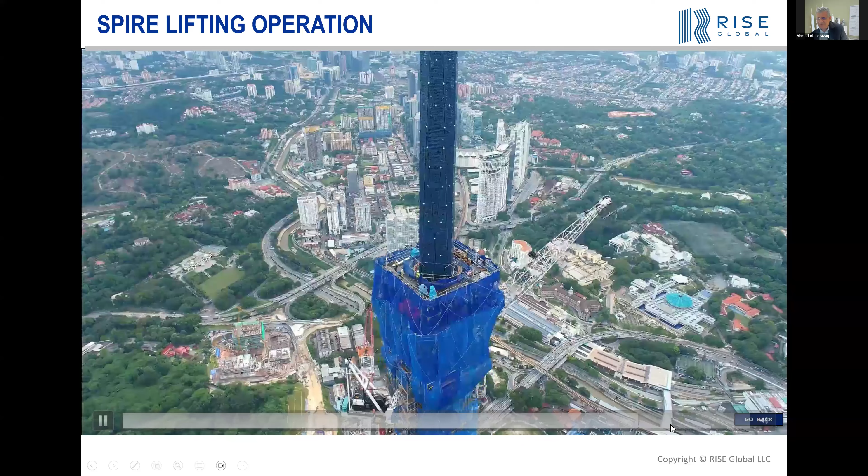And we worked with Eversendai out of Dubai and Malaysia on the structural steel work for this project. It's always very nicely coordinated.

And this is just some footage at the end of the project before it was all completed. And these are the final images of this project.

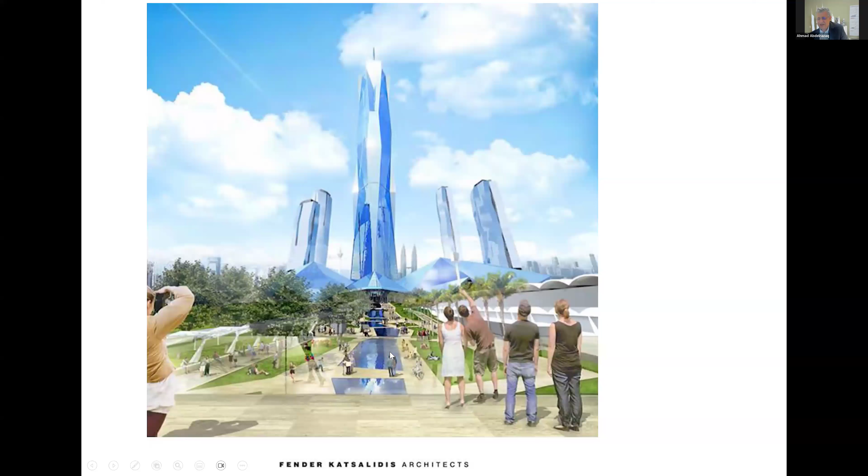One of the things I wanted to say, which I commend the architect for, is the integration of this project with the adjacent project, in which they created a promenade that's open to the public. It's like an open park where people can come and enjoy the day.

This is the retail area. So on a normal day, this is what it looks like, people can come here with their kids and enjoy both visiting the site and Merdeka 118. And we were able to manage the building movement enormously with this project.

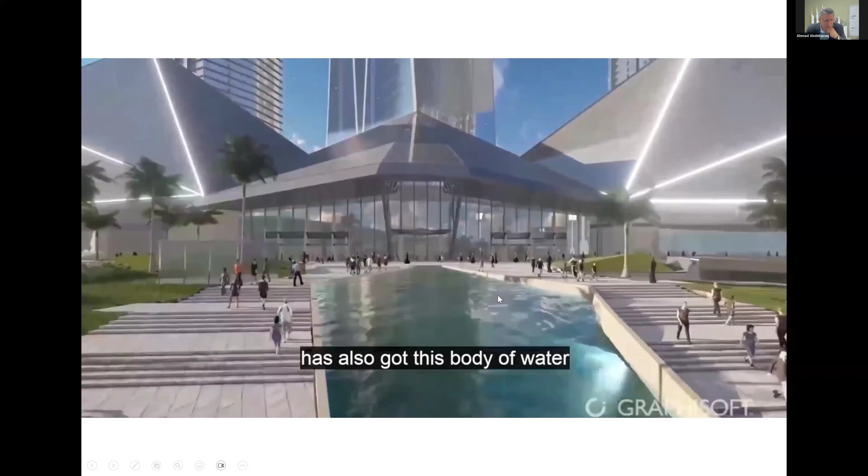Again, on this project, I would say we spent a lot of time, and we got hit by COVID. For three years, the project was mostly disrupted.

So this is just a short video put together by the Star, which is a major newspaper in Malaysia, to summarize the project itself. It's a short one.

And it was the first tower to win triple platinum ratings.